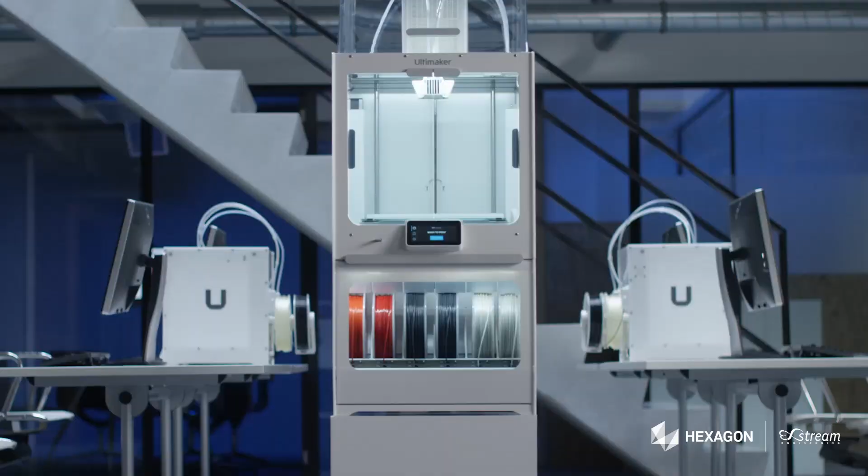My name is Paul Heiden and I'm responsible for the product at Ultimaker. From Ultimaker's perspective, we look at polymers. That's the technology that we focus on and that's where we want to be extremely good in.

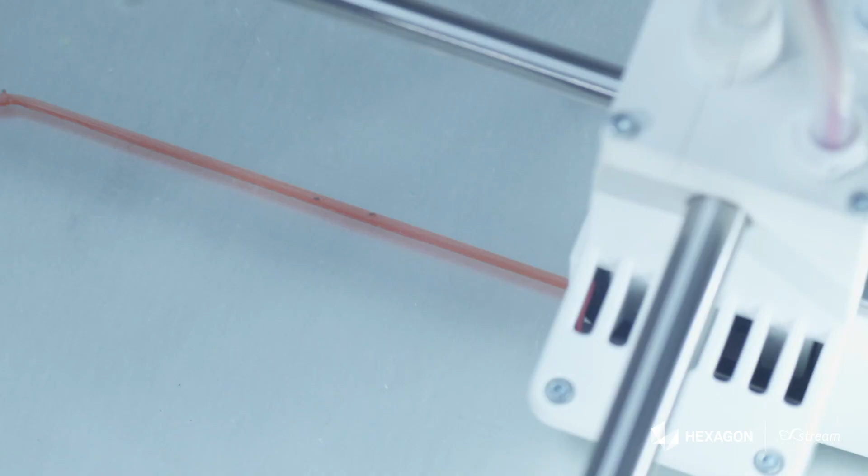We feel that above all the value of 3D printing is in what we like to refer to as distributed manufacturing. That's an enormous saving, that's an enormous positive environmental impact, and it's this kind of use scenario where on the one hand you produce locally and the distribution is really digital. So you let the software fly, you let the G-code fly, and you only make things where you need them, at the moment that you need. That's the real vision that Ultimaker is focusing on with regard to additive manufacturing.

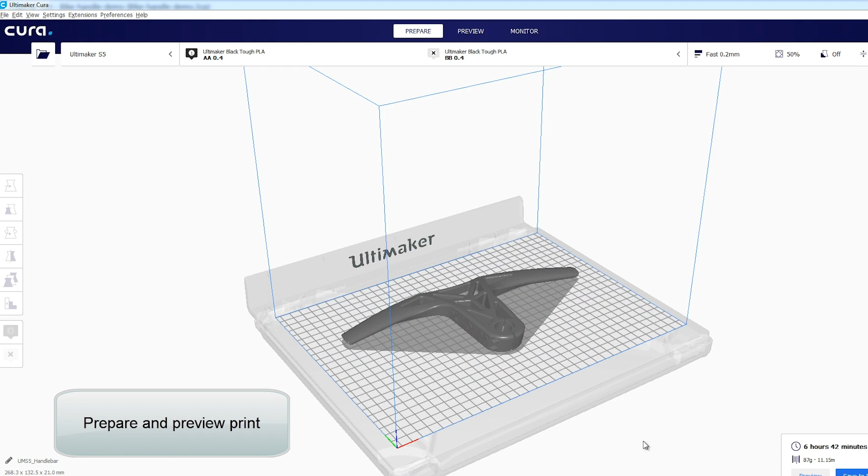But what's very important is Ultimaker is not just a hardware vendor, it's also a very successful software vendor. A real great opportunity in the future is that all these people that use Cura could also have access to the simulation capabilities within Digimat.

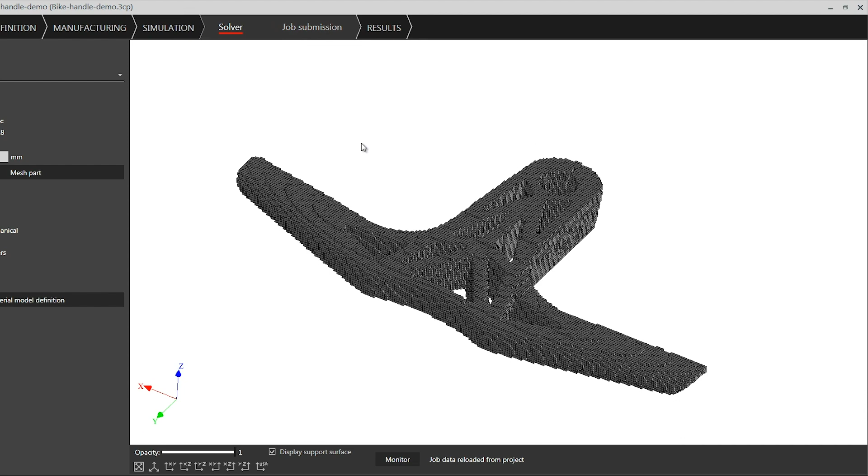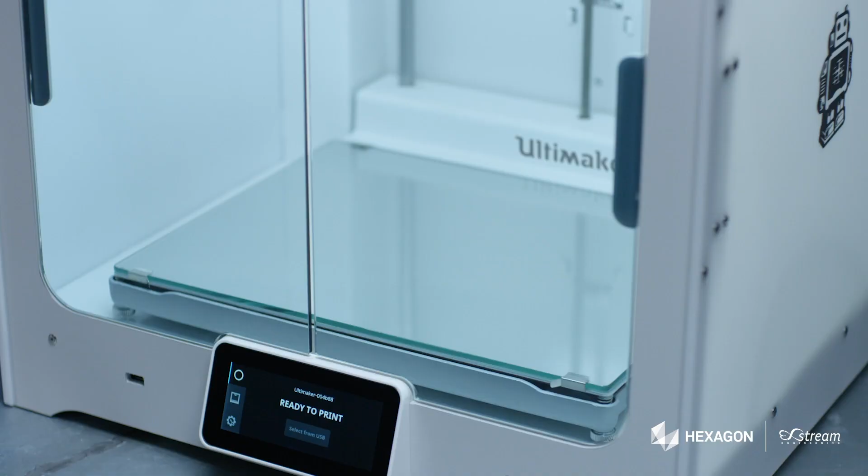The whole additive manufacturing stack that Hexagon is currently offering will give us an enormous acceleration, and that's what we're going to pursue, that's what we're currently exploring. We want companies to be able to accelerate their G-code production, make more parts available in the form of G-code in order to really start benefiting from distributed manufacturing. And of course immediately things like simulation come into play.

It is in accelerating and improving the quality of G-code where we really can start working together. And that's in the longer term, not just in terms of simulation, it's also about knowing more about materials, being able to optimize the topology, perhaps talk about gradual infill and making sure that you really get the value of 3D printing.

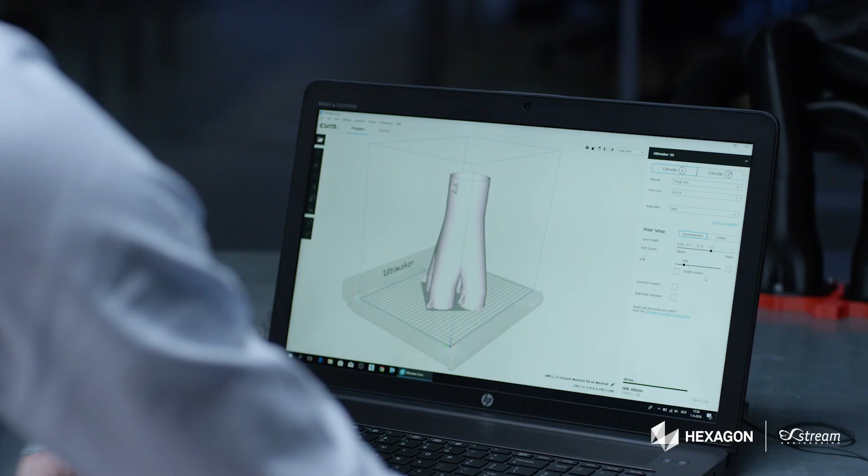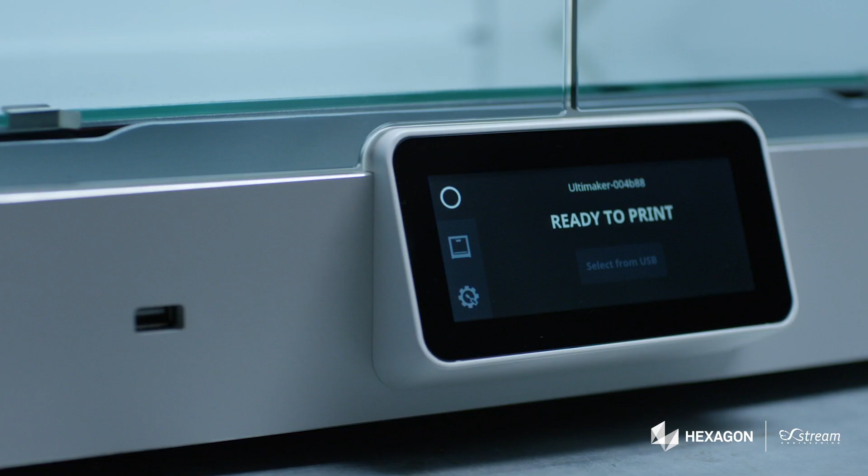But time and time again you will see that there is a complete dependence between the capabilities of the machine, the capabilities of the materials and the capability of the simulation software, and everything needs to come together. It's almost like you choose the material, you choose the machine, and that will color the way how you will simulate, the way how you will optimize your topology. So it's not something that you can independently do.

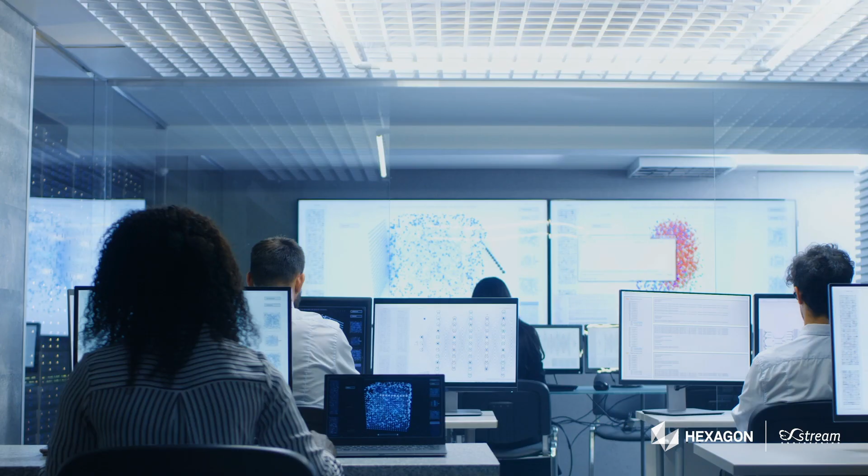It's something where we need the 3D printer manufacturer, Ultimaker in this case. It's the material manufacturer that you need. It's Hexagon that we need in order to improve and make better and better simulation in order to accelerate the creation of G-code.

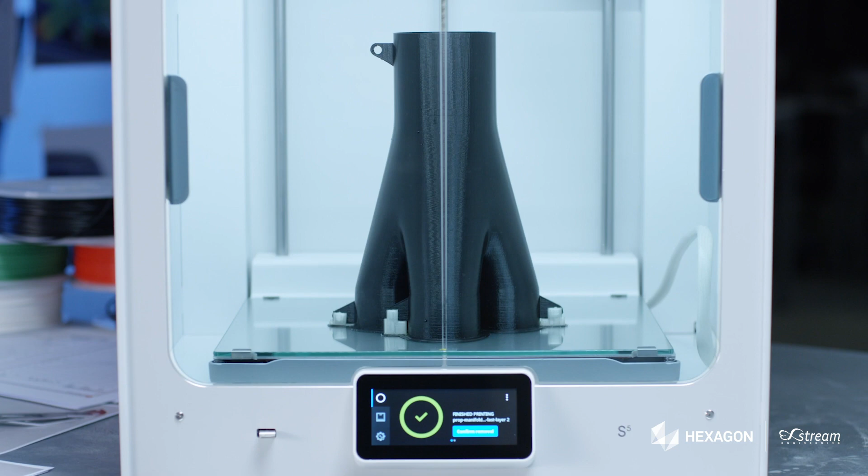So if you ask me where the additive industry will be in perhaps 5 years' time, I think what will happen from the perspective of Ultimaker is that we will really have a consolidation in the market. There will just be a few manufacturers of 3D printers.

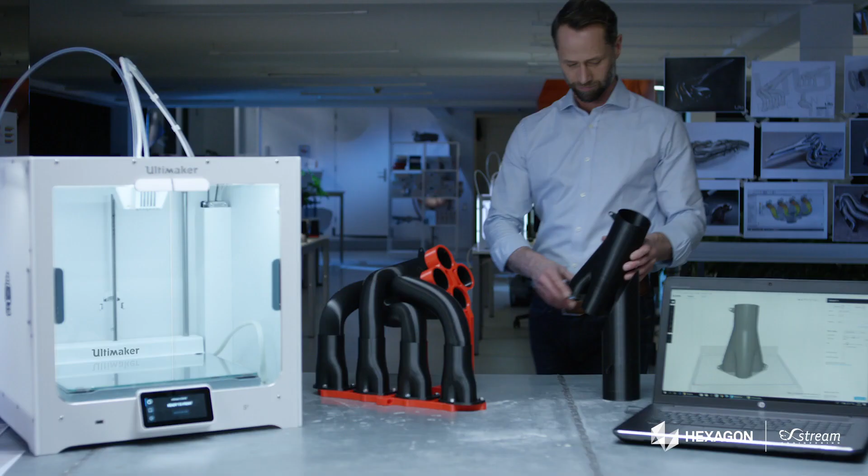So the capability of the machine determines, together with the capability of the material, how you simulate. It determines how you create topology. It even determines how you can make a geometry. There's an enormous interaction between the three of them.

Together we're able to provide small, extremely useful sets of services that everybody who is using Cura in a professional fashion can access to improve their work and get faster to the right results.